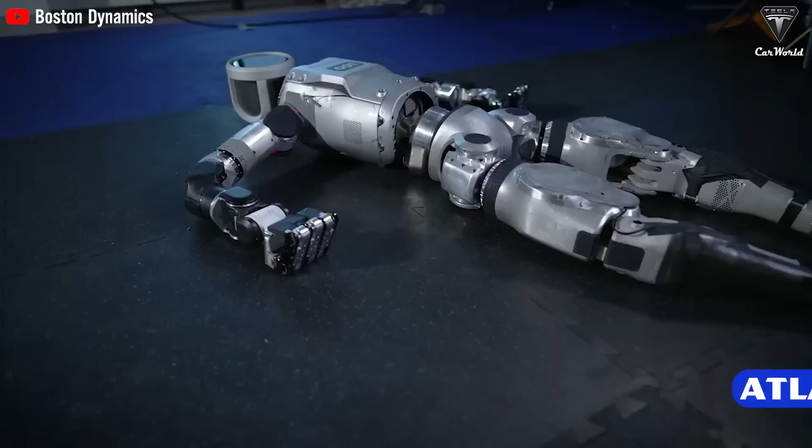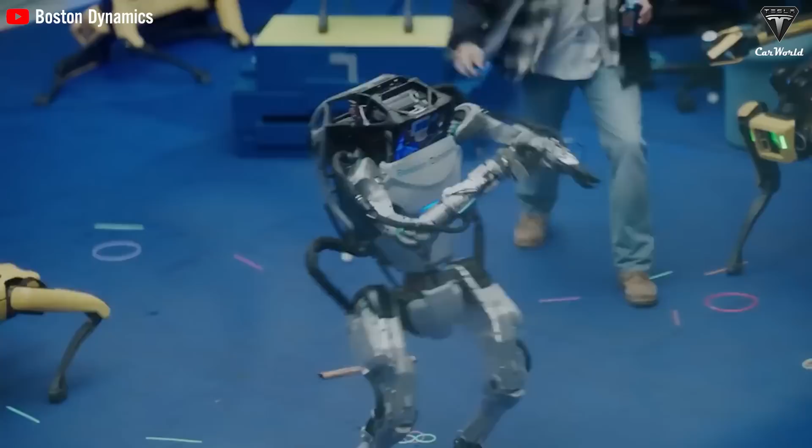While Tesla decided to produce both Gen 1 and Gen 2 for the Optimus robot, Boston Dynamics seems to be going in the opposite direction. The decision to release Atlas Gen 2 and discontinue old Atlas makes many people regret it, because at least the old versions have gone through nearly 15 years of research. The reason behind the failure of Atlas Gen 1 is a big secret that the manufacturer does not want to tell us. This is the reason why the older generation cannot be commercialized. So why is Boston Dynamics not able to commercialize its robots like Tesla?

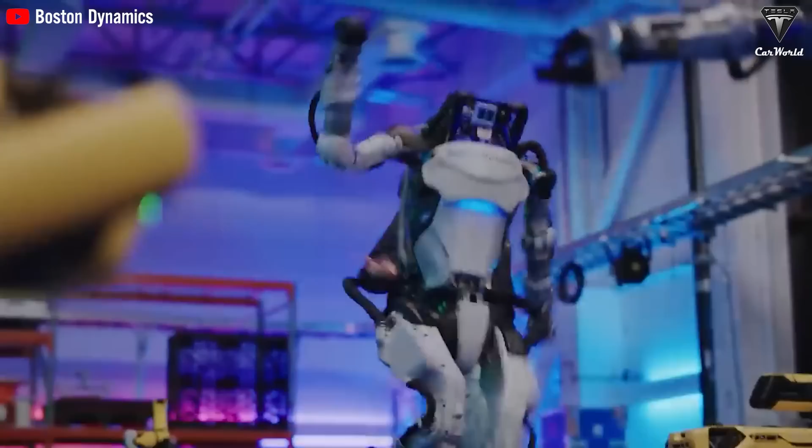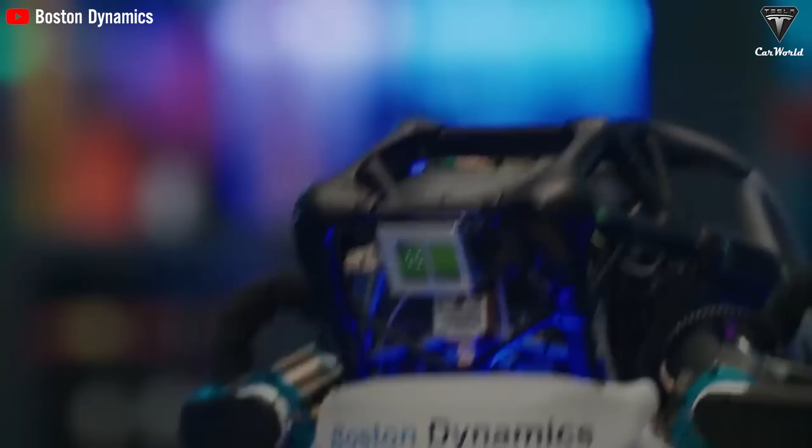Unlike Optimus, who's a freshly bloomed flower, Atlas has undergone a journey to reach the present. The humanoid robot was developed by Boston Dynamics starting in 2009 after winning a $26 million contract to produce bipedal robots for the U.S. military. Over the years, Atlas Gen 1 has achieved many remarkable feats, such as walking like a normal person, running and jumping on rough terrain, and maintaining good balance.

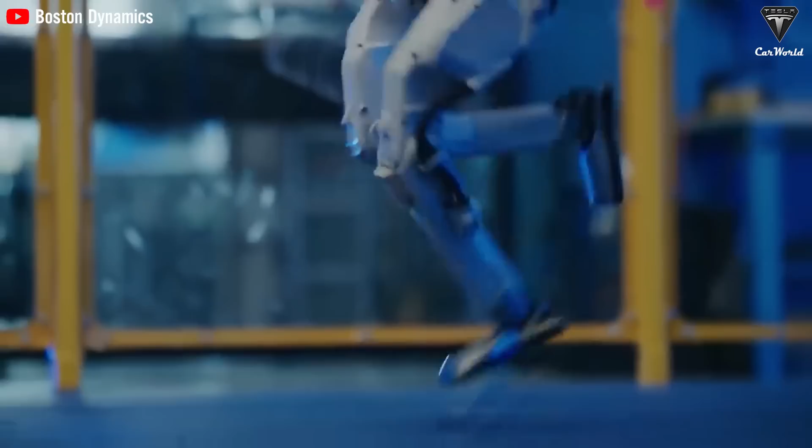After starting with rudimentary tethered versions in its early days, Atlas finally integrated batteries for autonomous operation. It seems that as Atlas Gen 1 was expected to be continuously upgraded to compete in the market alongside the Gen 2 version, both versions combined would create a significant gap with Tesla's Optimus. However, Boston Dynamics recently stunned the tech community when the manufacturer confirmed that the older humanoid robot version, Gen 1, would be retired to make way for its Gen 2 successor.

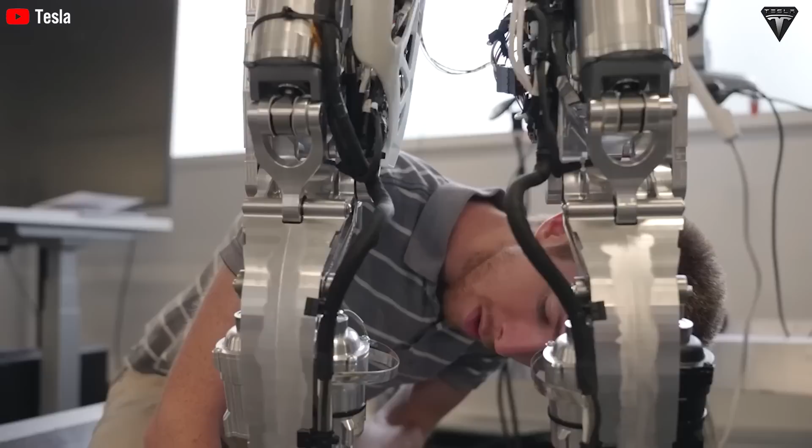We believe that the lack of commercial potential for the Atlas Gen 1 robot, unlike Tesla's bot, is one of the primary factors leading to this discontinuation. So why couldn't Boston Dynamics commercialize Atlas? From viral videos to highly anticipated articles, Boston Dynamics' Atlas has become an icon of progress in robotics. Despite the praise and attention, a lingering question remains: why hasn't such a seemingly perfect technology found its place in the commercial market?

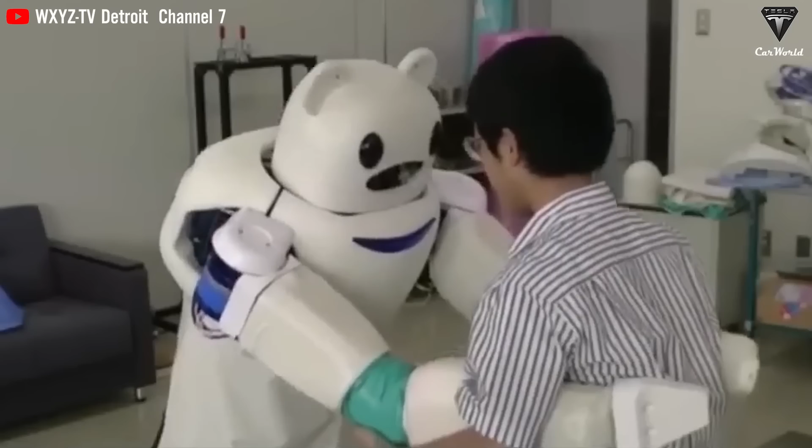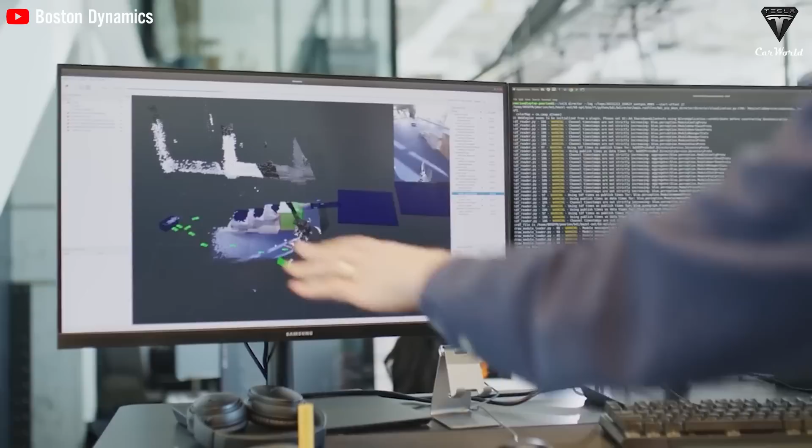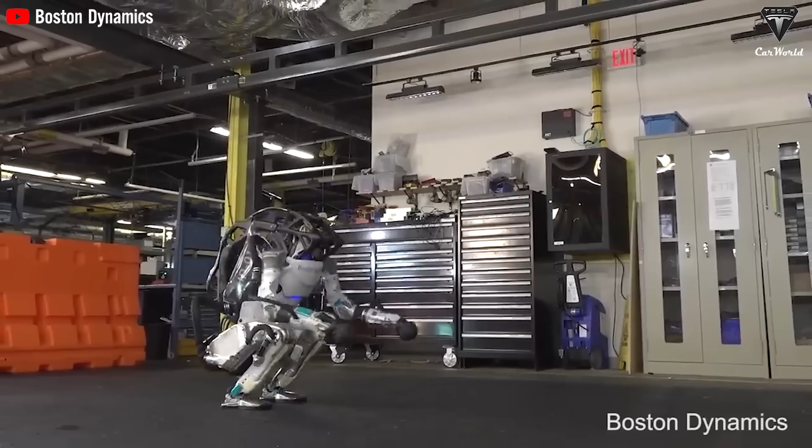However, when looking at Boston Dynamics, there's something quite off. Atlas Gen 1 leaks with a much higher price tag, up to around $150,000, and Atlas Gen 2 might surpass this price. We're unsure why they're priced so high. It could be due to the hydraulic drive systems or expensive integrated machinery and materials, but it's clearly an issue. This significant price difference not only makes Atlas difficult to compete with rivals like Tesla's Optimus robot, but also renders its use economically unfeasible for many organizations and individuals.

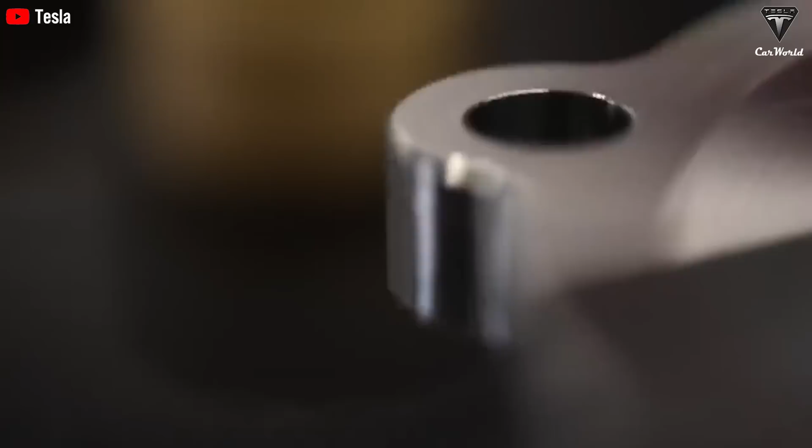Not to draw direct comparisons, but it's as expensive as two Model X's combined. The high price tag makes it inaccessible, making Boston Dynamics' decision to cease development and production of Atlas Gen 1 more understandable now than ever before.

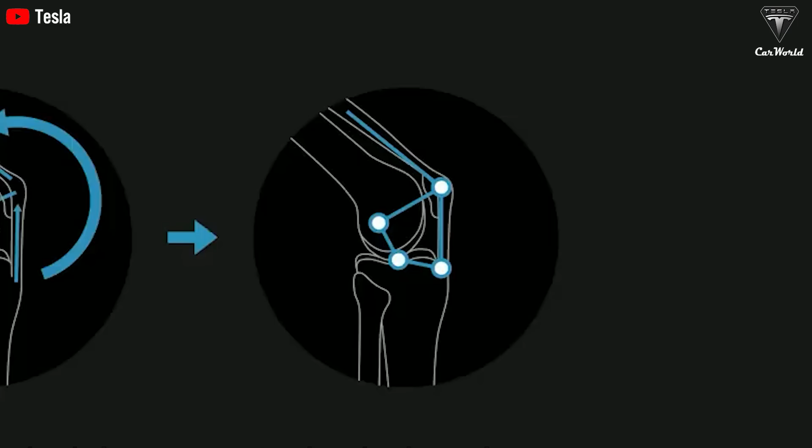Why is hydraulic transmission so difficult to convince customers? While price is an issue for those on a budget, hydraulic drive is an issue for convincing demanding customers who want a quieter, lower-maintenance robot. The old Atlas robot is famous for a unique hydraulic drive system that provides strong performance specs. Yes, it does have an advantage over the electric Optimus when it comes to the power that the hydraulic drives produce. But behind these great advantages is a multitude of limitations and risks that Boston Dynamics has to face.

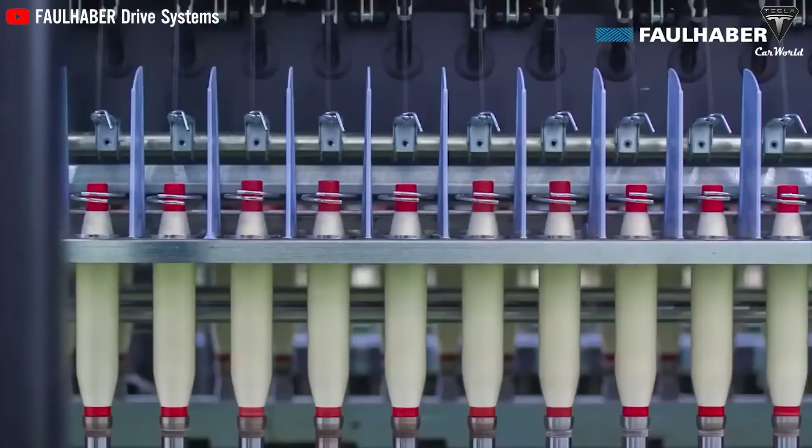The hydraulic system uses liquid to operate, so it makes Atlas operate with loud noises. Noise is generated from most processes starting from the hydraulic pump. The pump creates the necessary pressure for operation, and gear pumps commonly create noise from the impact of the pump teeth, especially when operating at high pressure. This noise can be transmitted from the pump through pipes and cylinders, enhanced by vibrations and shocks in the system. Hydraulic valves also contribute to noise when they're used to control the flow and direction of hydraulic oil. When valves open and close, they can create noise from the vibration and impact of internal components.

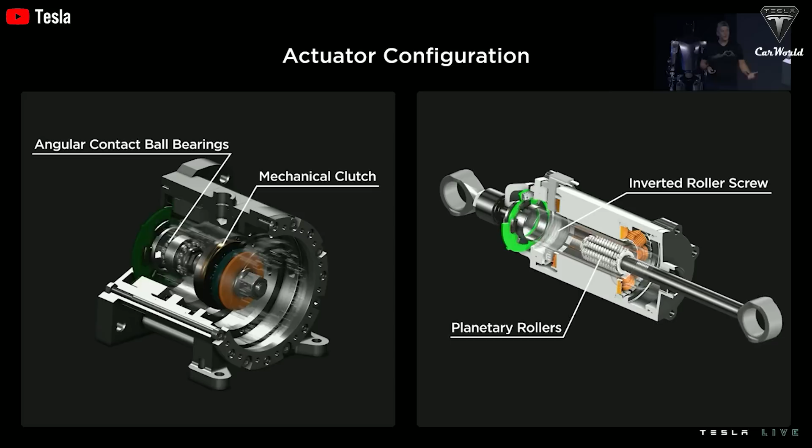Finally, the noise comes from the hydraulic cylinder. Hydraulic cylinders are responsible for converting hydraulic energy into mechanical movement. Pistons moving inside the cylinder can create noise due to friction and oil leakage. What do you think about a noisy robot with this drive system? Most probably don't like it, even if it generates a lot of power to perform the task.

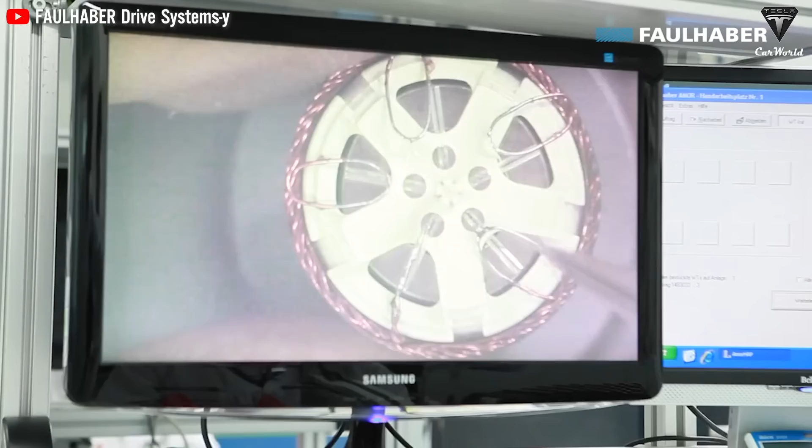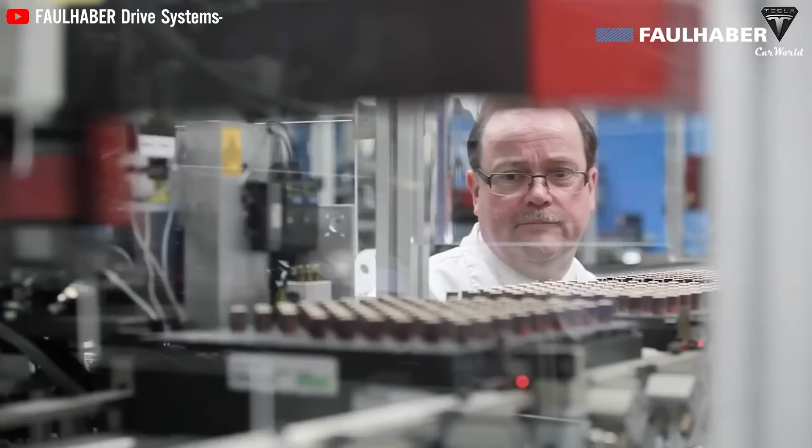Of course, the disadvantage of the hydraulic drive system found in the Atlas is not only noise, but also safety and maintenance. Atlas makes many people afraid of the risk of fluid leakage in the hydraulic transmission system. Once the fluid leaks, the system will not have enough fluid to lubricate the moving parts, leading to increased friction and wear. Leaks also create pollution, fire and explosion hazards, leading to accident risks and significant maintenance costs.

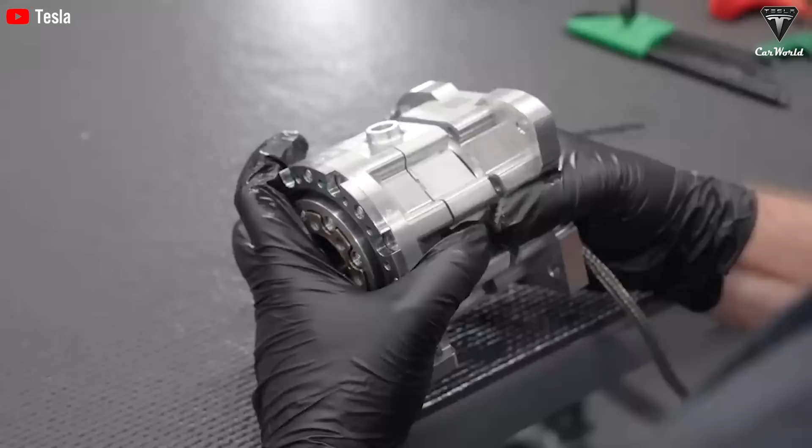The hydraulic transmission is so bad that Boston Dynamics has admitted that it has an outdated transmission system that no longer reflects modern needs and safety standards. This not only affects Atlas's performance, but also poses a major challenge in maintaining and upgrading it to meet today's market requirements.

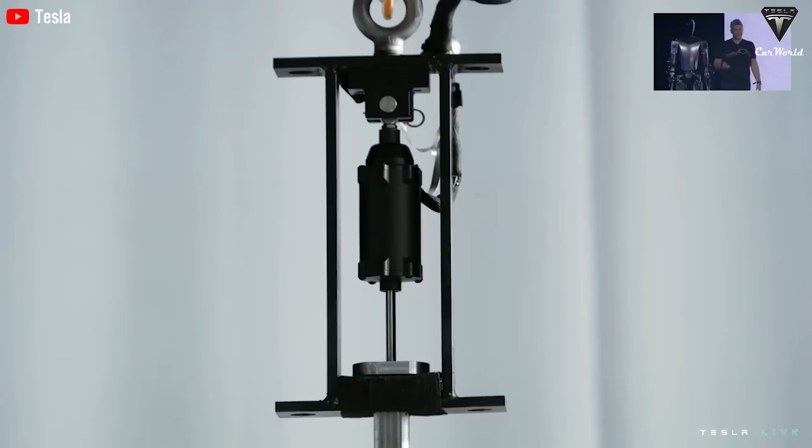The evidence is that Boston Dynamics has discarded this type of transmission system and learned from the way Tesla developed Optimus. Immediately after discontinuing the first-generation robots and hydraulic transmissions, Atlas Gen 2 now runs entirely on electricity like Optimus. Therefore, it can be seen that the hydraulic transmission system has suppressed the development of the old Atlas.

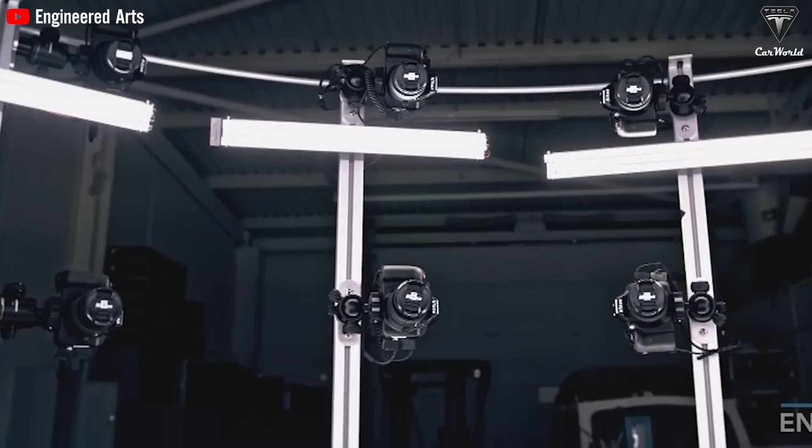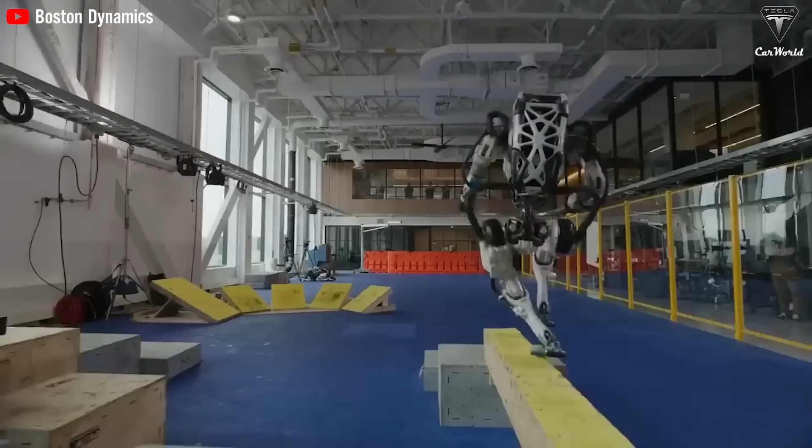For this reason, Boston Dynamics might have concluded that the production and maintenance costs outweigh the benefits of selling Atlas. Why would Atlas's design be difficult to commercialize?

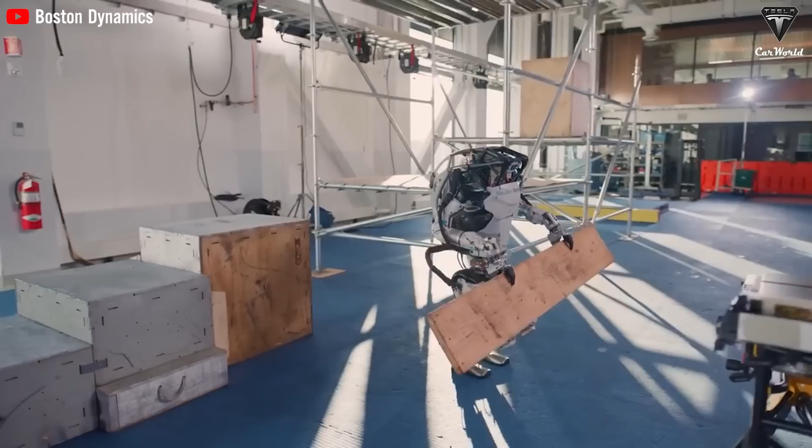We wanted to have a machine that when we did announce said to the world that Boston Dynamics just set the bar for humanoids again, Robert Playter, chief executive of Boston Dynamics, said in an interview.

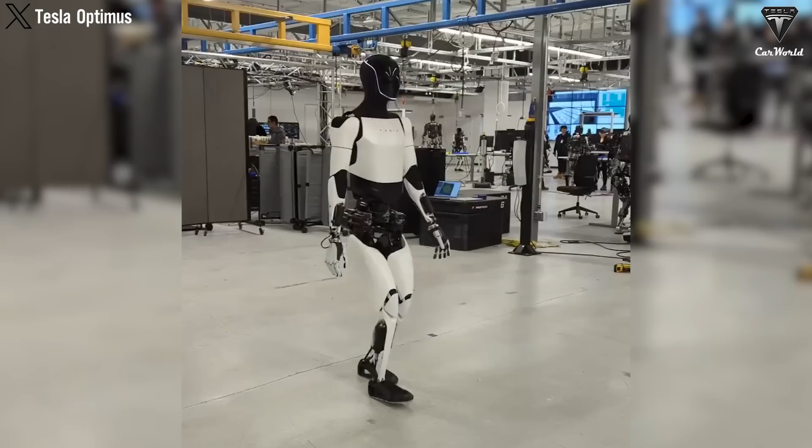This means that even for the manufacturer, the design of the old HD Atlas is still a drawback that they have to acknowledge. When looking at the designs of Optimus and Atlas, even with the Atlas Gen 2, there's still significant contrast in their appearance. While Optimus is designed based on a sleek 5'8" standard size, creating aesthetics, flexibility, and user-friendliness suitable for home environments and consumers' daily needs, Atlas has a rugged, complex design that goes against the humanoid-like design.

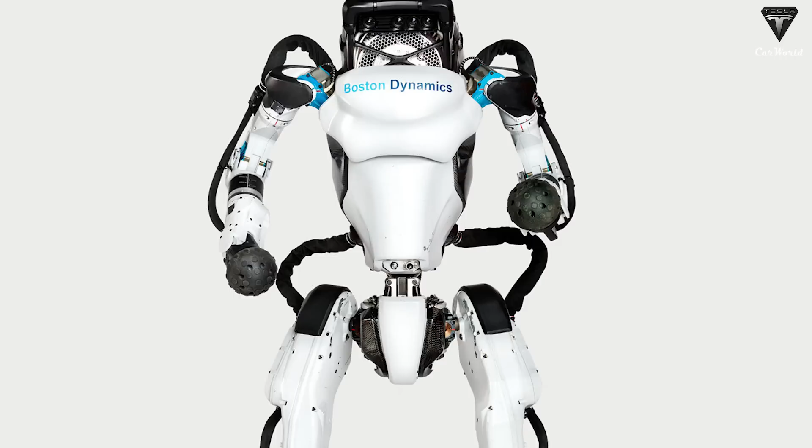Just imagine a robot you bring home causing your kids to scream, cry, or simply be frightened. That could be seen as a major failure for the manufacturer. With its rather cold and less than human-like experience, Atlas could indeed invoke fear in many people, especially young children.

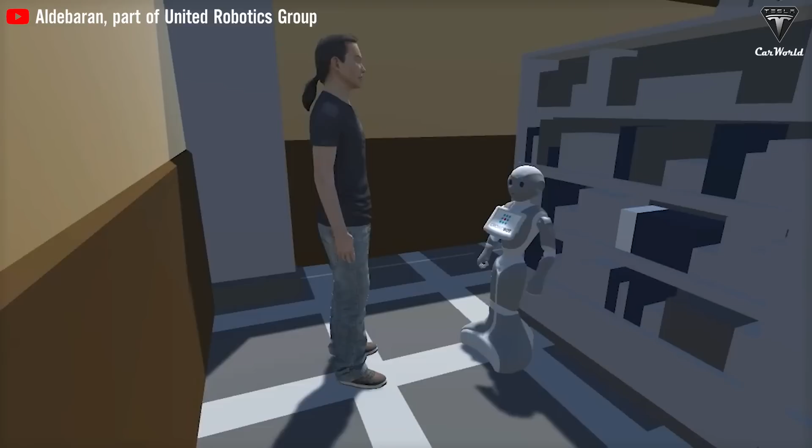If the robot fails to create a sense of intimacy, it'll directly affect how people interact with it, akin to feeling distant and uncomfortable when engaging with it. This creates a psychological barrier to acceptance and usage in everyday environments, contributing to a reduced appeal of Atlas to consumers. Why is it difficult for Boston Dynamics to mass-produce humanoid robots?

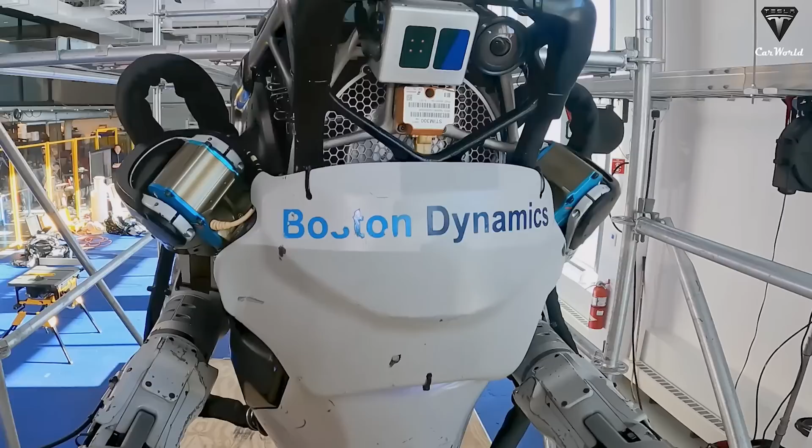Over the past decade, the development of the Atlas robot has attracted attention and expectations from the global robotic technology community. However, it's noteworthy that even after many years, the number of Atlases produced remains quite low. Instead of focusing on mass production, Boston Dynamics has decided to dedicate time and effort to continuously testing and improving the existing model. Currently, despite the demand for commercializing Atlas on a large scale, the company has not yet attained

sufficient manufacturing capability to meet it. Their technology and manufacturing processes are still being developed and optimized to ensure the quality and performance of each robot.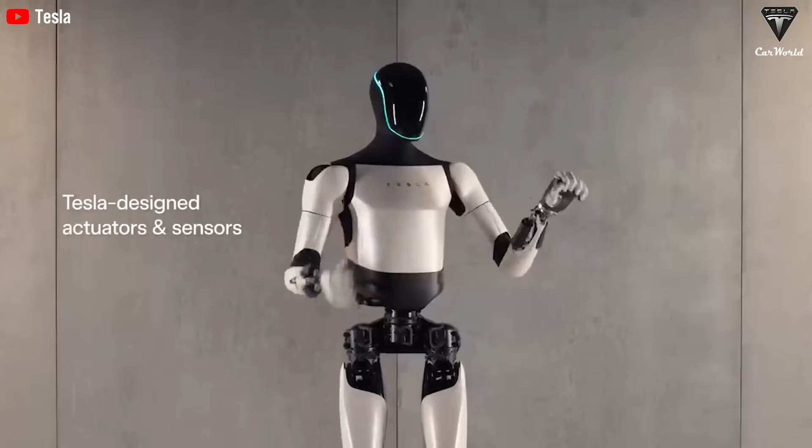We are able to do simple factory tasks, or at least I should say factory tasks in the lab. We do think that we will have Optimus in limited production in the actual factory itself, doing useful tasks before the end of the year. And then I think we may be able to sell it externally by the end of next year. These are just guesses, said Elon Musk during the Tesla first quarter 2024 earnings call.

Elon Musk has shared this forecast with investors, which is also related to his own robots. Previously, Musk stated that robot sales could become a larger part of Tesla's business than other segments, including car manufacturing. According to him, Tesla has a better advantage than any other humanoid robot manufacturer to achieve large production volumes while ensuring that the robots have efficient self-reasoning capabilities.

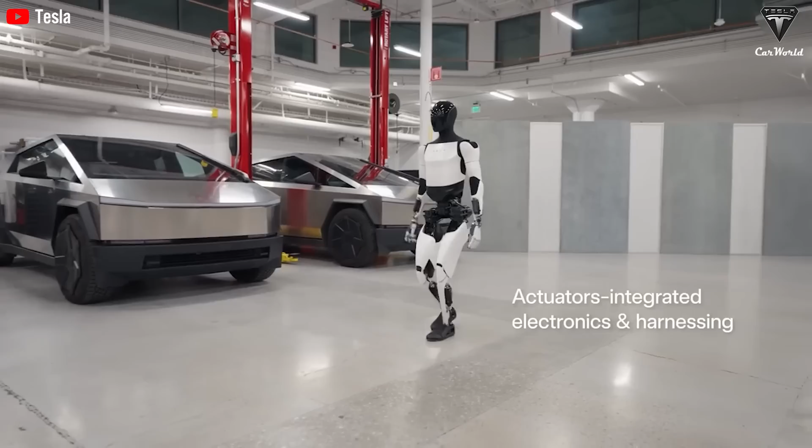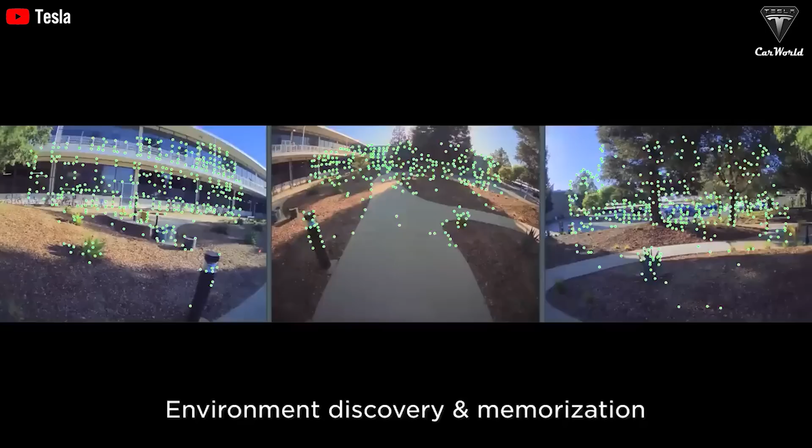Although Tesla does not have a dedicated factory to manufacture Optimus robots like Boston Dynamics, the potential for mass production is there. At the very least, they have experience in car manufacturing and know-how to get a product rolling off the assembly line as quickly as possible.

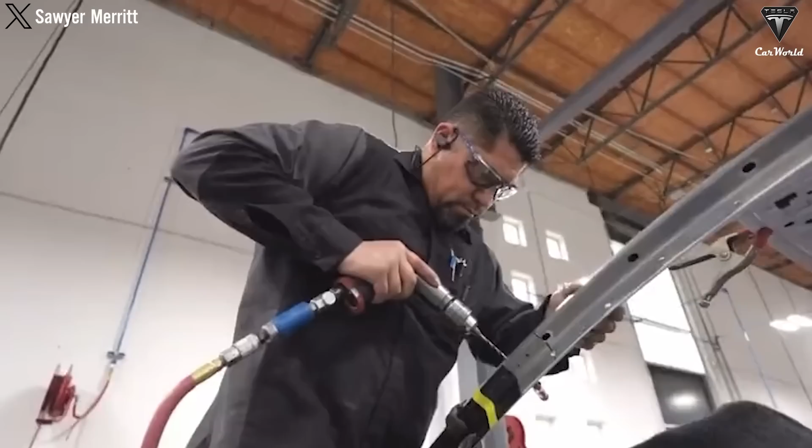Through the process of producing thousands of electric cars every day, Tesla's built an efficient and flexible production system, from optimizing processes to automating some stages. Additionally, Tesla has also significant relationships with component suppliers. This is particularly important in manufacturing a complex product like Optimus, with hundreds, if not thousands, of different components. Stability in the supply chain can help minimize risks and reduce the time needed for product design and development.

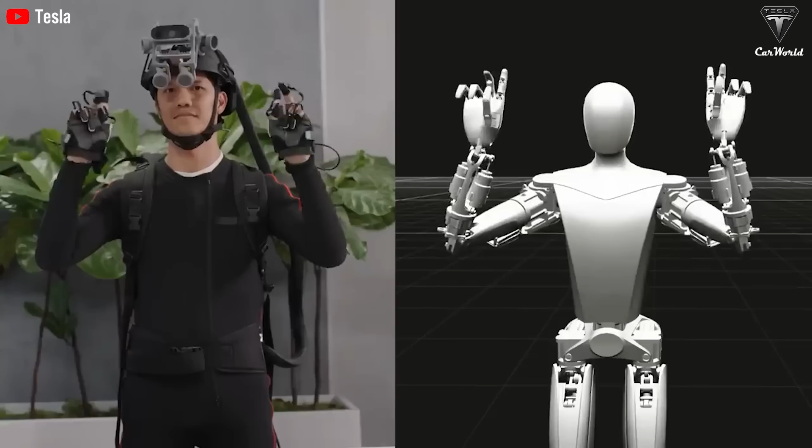Therefore, expanding the scale to commercialize Optimus is easier than Atlas, which is understandable. Not only does it rely on existing technical foundations and quality management, but also on support from established supply chain partners. This can help Tesla quickly transition from car manufacturing to robot production.

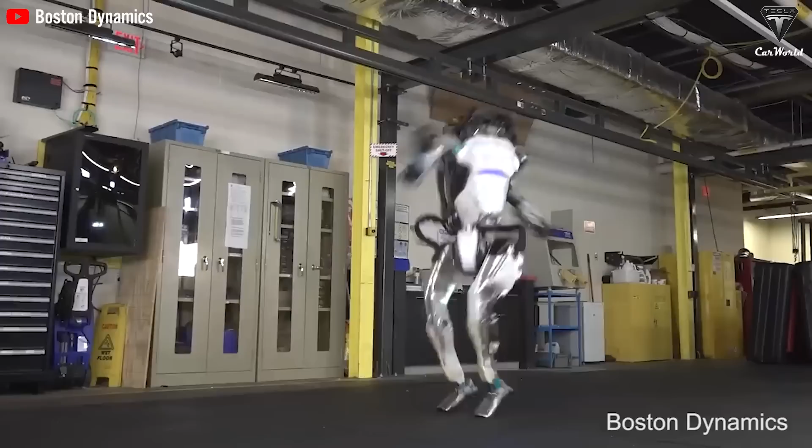Although low production volumes may limit the accessibility and application of Atlas in industrial and service sectors, Boston Dynamics still aims to create high-quality and innovative products. By focusing on continuous testing and improvement, they hope to provide increasingly better humanoid robot solutions to the world.

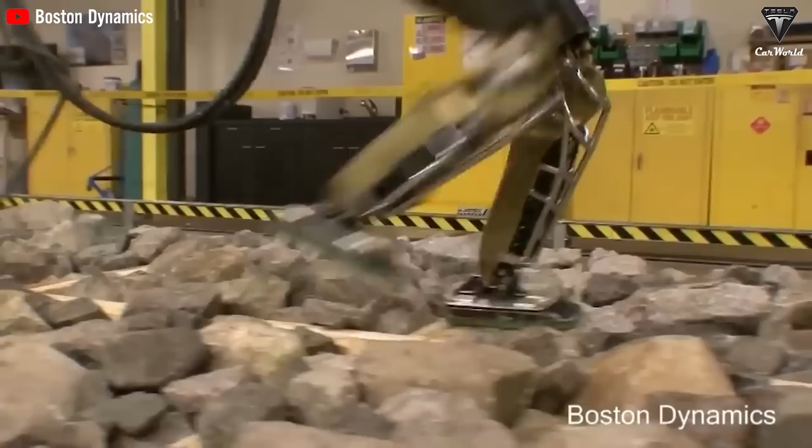How challenging is it for a pre-programmed Atlas robot to impress customers? Ultimately, while Atlas can perform pre-programmed tasks impressively, it lacks the ability to learn autonomously like other AI technologies. This limits its adaptability in new and complex situations.

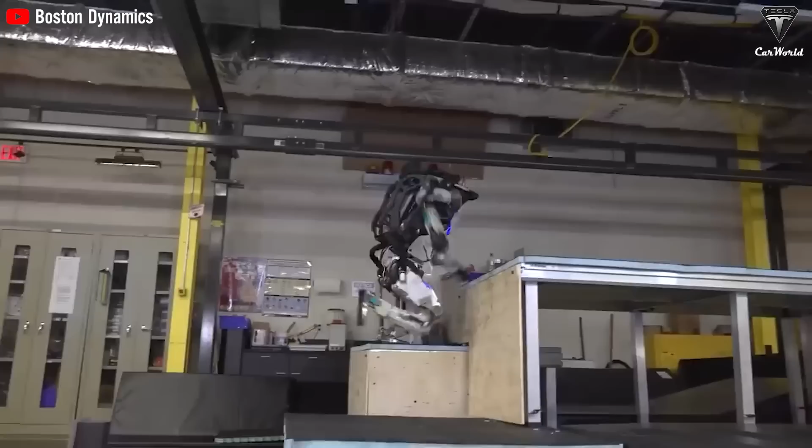Although designed to operate autonomously without direct human control, its capabilities are still constrained by certain challenges in AI programming. The development process is slow and costly, making it difficult for Boston Dynamics to meet consumer expectations, which could be a contributing factor to the decision to discontinue this generation of robots.

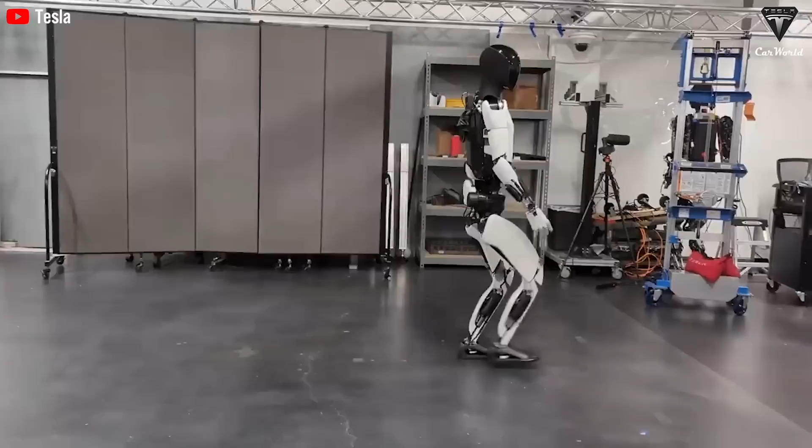Optimus's capabilities focus on performing everyday tasks, supporting households as a homemaker, as Musk once stated. He plans to produce billions of units because he believes many people want more than one.

In contrast, the older Atlas was primarily developed to perform dangerous and uncommon tasks not typically encountered in daily life. It's more accurate to say that Atlas is not suited for the increasingly advanced world of artificial intelligence development.

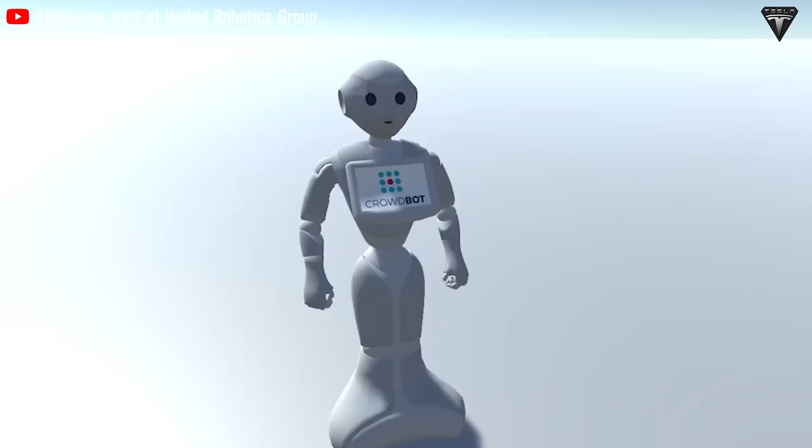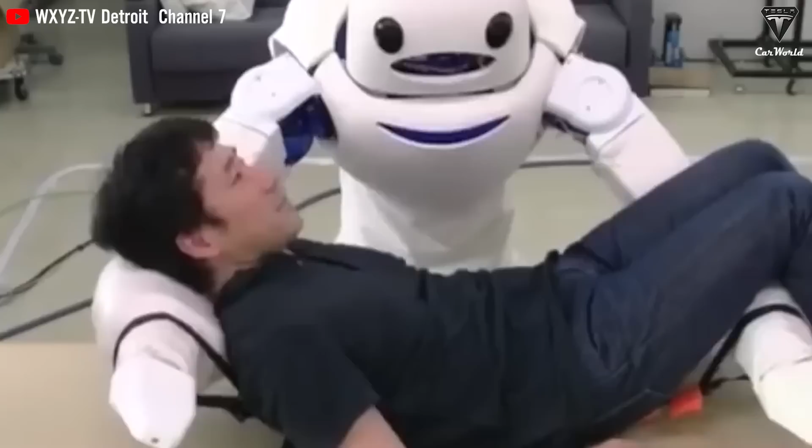Optimus has its own brain or central processing unit provided by an artificial intelligence chip containing a trained neural network. The robot also relies on artificial intelligence technologies such as deep learning and computer vision, along with cameras and autonomous sensors, to perceive and navigate the surrounding environment, as suggested on Tesla's recruitment page.

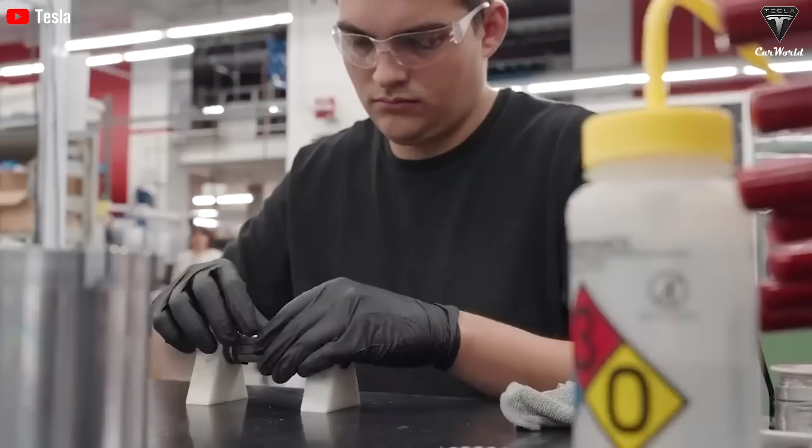Optimus also features an image navigation system managed by end-to-end trained neural networks for locomotion. It's loaded with a library of reference materials on natural motions. Essentially, engineers have recorded human movements such as taking a box off a shelf and mapped that motion data, optimized to adapt to real-world environments, into Optimus.

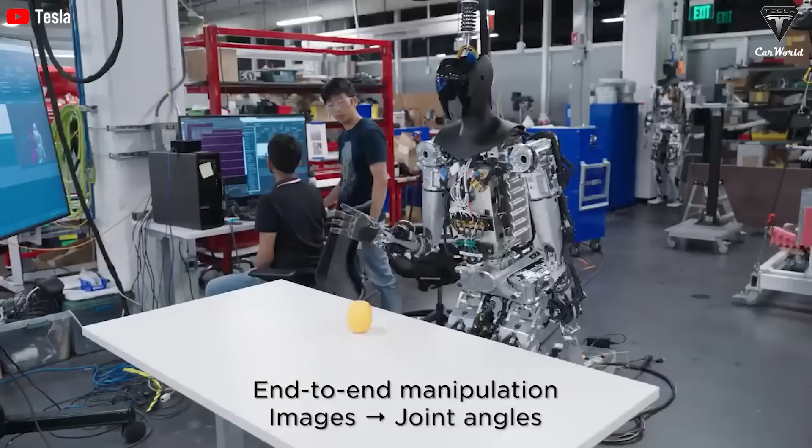Because Tesla's robots use the same artificial intelligence system as the company's vehicles, it can remember environments to enhance future interactions. Musk has asserted that Tesla's humanoid robots differentiate themselves with superior AI inference capabilities, which help machines process information rapidly and were initially developed for its self-driving vehicles.

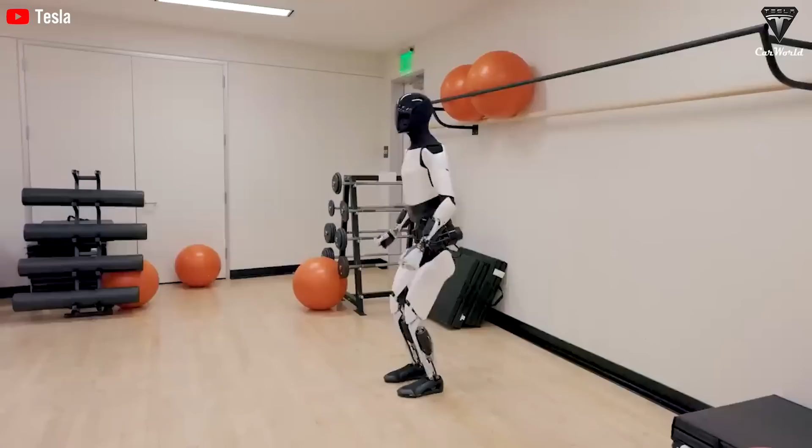According to Milan Kovac, an engineer on the Optimus robot, Tesla has designed, trained, and deployed some of the first end-to-end neural networks specifically for humanoid robots, which have been demonstrated to autonomously perform tasks requiring coordinated control of a humanoid's body, torso, arms, and fingers.

It's also possible that there isn't enough demand for such advanced robot systems among potential customers, especially when compared to simpler robots that offer more basic functionalities at lower costs. This could explain why Boston Dynamics decided to discontinue the production and sale of their humanoid robot, Atlas.

With over 20 years of experience, many people tend to use Boston Dynamics as a benchmark for humanoid and legged robots. Compared to Boston Dynamics' humanoid robots, Optimus lacks the ability to move quickly and agilely.

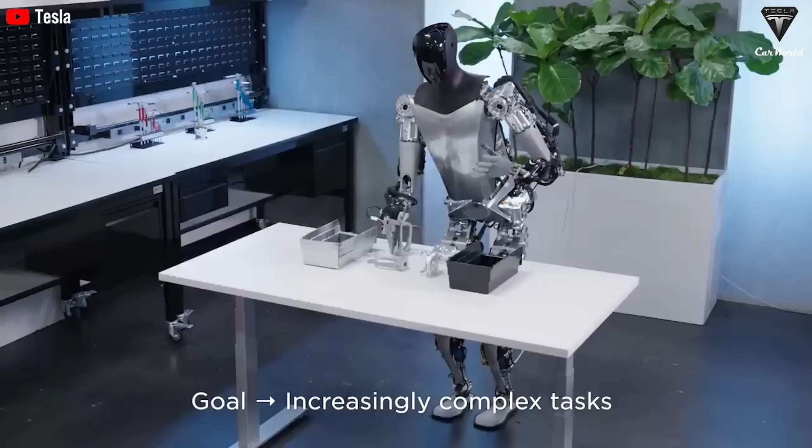However, Optimus possesses dexterous hands that Boston Dynamics lacks and an even more advanced AI processor. This is a unique difference in humanoid robots. Most service robots struggle with complex movements and delicate operations.

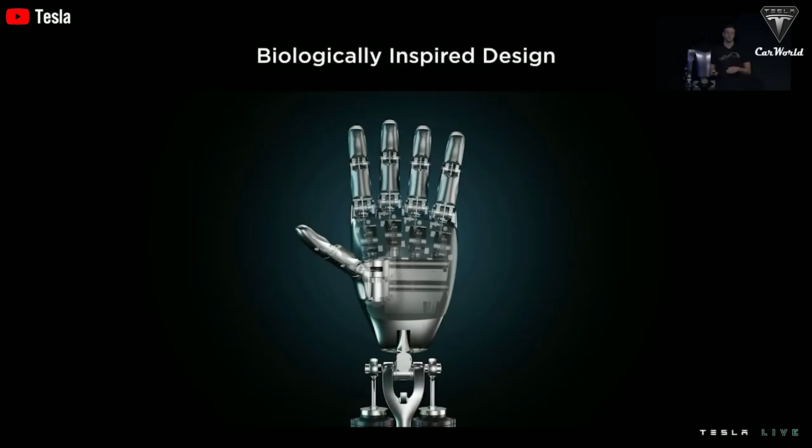This is a significant barrier because robots will still have many limitations without the ability to control and manipulate objects delicately. Although 11 degrees of freedom is impressive, we believe there's still a significant gap between robot hands and human hands, which typically have 27 degrees of freedom.

As for technical details disclosed so far, Optimus is equipped with a 2.3 kilowatt-hour battery pack, along with Wi-Fi and LTE connectivity. Currently, the robot weighs around 72 kilograms.

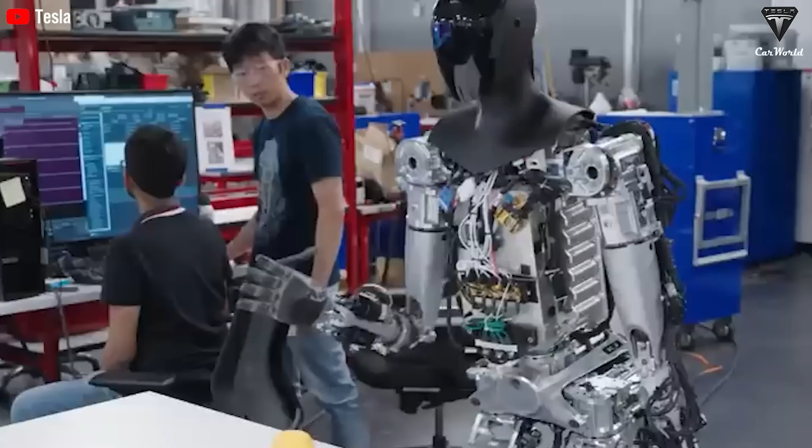The 2.3 kilowatt-hour battery pack is sufficient for Optimus to perform tasks throughout the day. The robot's power consumption is 100 watts when idle and 500 watts when walking.

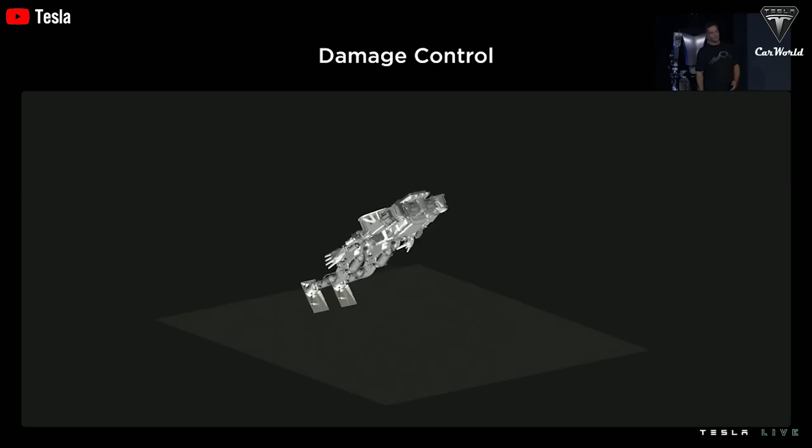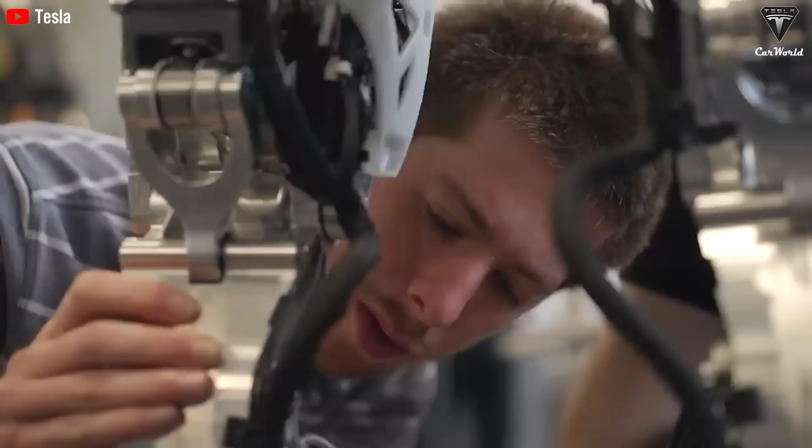It's entirely based on a biomimetic design to enhance its agility. Demonstrations have focused on how Optimus handles its joints, such as hands, wrists, and knees, showing how they process data for each joint. Optimus features a total of 28 electric actuators distributed throughout its body and 11 degrees of freedom in its hands.

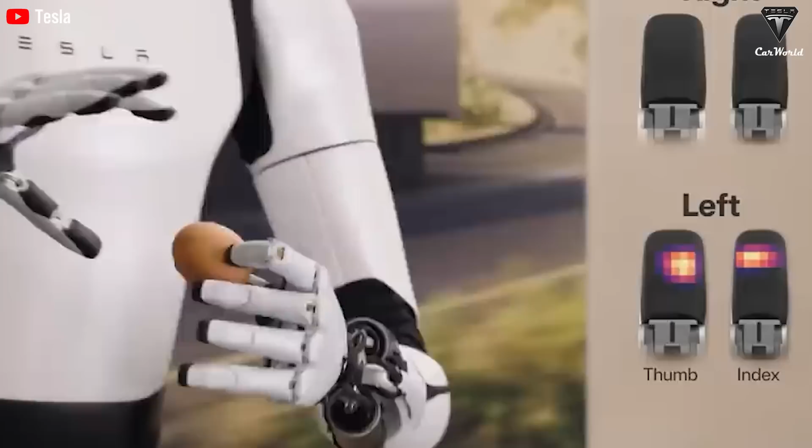Additionally, there are sensors in its fingertips, allowing Optimus to provide haptic feedback when directly manipulating objects.

Altogether, these features make Optimus a superior humanoid robot with significant commercial potential, as many of us would be eager to purchase them immediately based on what Tesla has promised and demonstrated about Optimus.

In contrast, Boston Dynamics has not yet disclosed the technical specifications for their new Atlas, but it's sure to be impressive once they upgrade it.

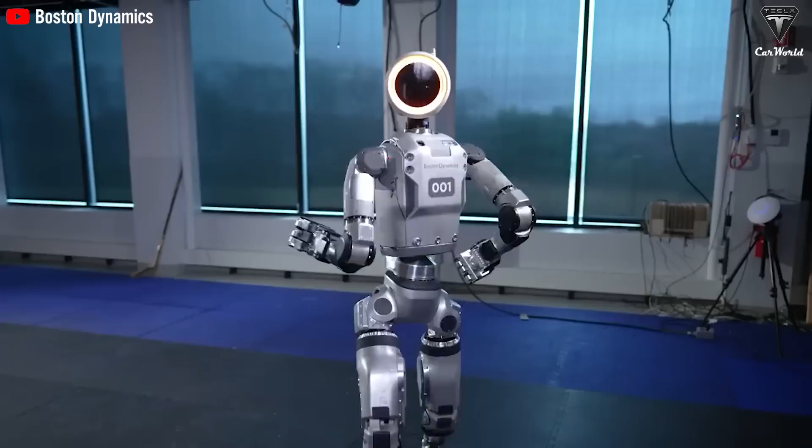Boston Dynamics' decision to retire their older generation humanoid robot and transition to a new generation demonstrates their commitment to commercializing their products after years of setbacks with the Atlas robot.

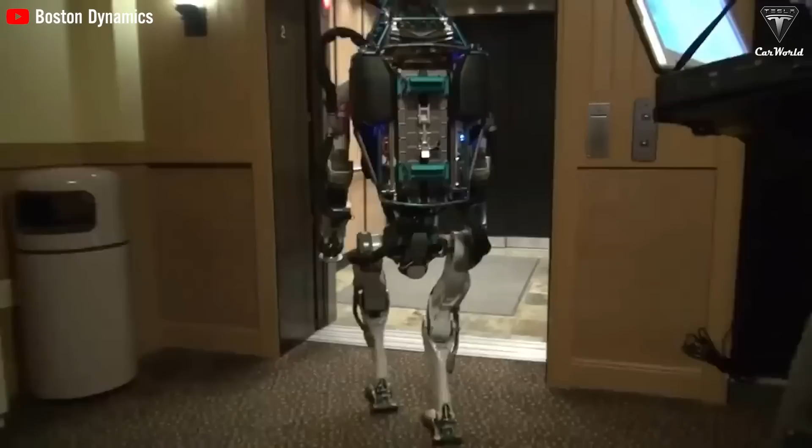You may think that the Atlas robot is merely a research platform and therefore cannot be commercialized, but this is not entirely true. Although it can perform some amazing feats like backflips and parkour as seen in YouTube videos, it's not designed as a complete product, making it a challenge to bring to market.

In the end, regardless of the reasons behind discontinuing their advanced humanoid robots, Boston Dynamics' decision marks the end of one of the most impressive technical feats ever created by humanity.

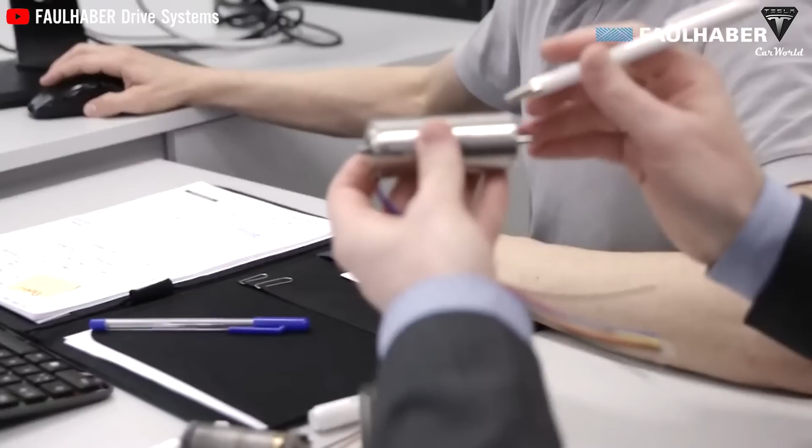In summary, although Atlas has great potential, Boston Dynamics needs to overcome challenges regarding price, performance, safety, and design to successfully commercialize it.

Ultimately, the support from Tesla with its strong brand, widespread distribution network, and abundant financial resources is a significant advantage that helps Optimus easily access the mass market.

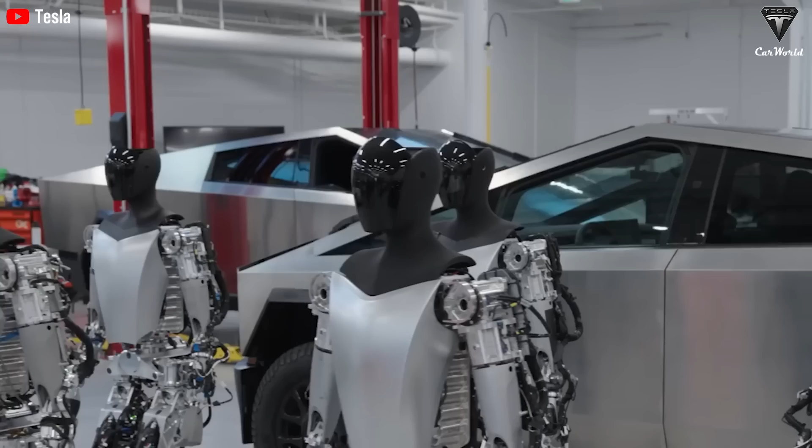Meanwhile, Boston Dynamics, despite being a deep research company in the field of robotics, lacks commercial product experience and large-scale manufacturing resources to bring a large number of Atlas robots to market.

So, what do you think about the old HD Atlas robot being discontinued when it couldn't be commercialized for so many years? And do you think Tesla or Boston Dynamics will win the humanoid robot race in the future?